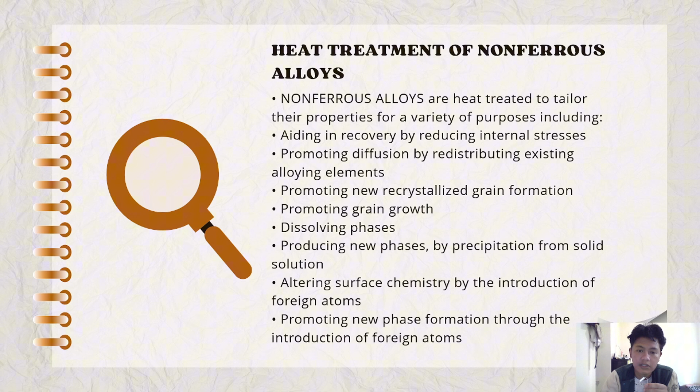Recovery and recrystallization annealing. Annealing is primarily a function of two main variables in non-ferrous alloys: the temperature to which the material is heated and the hold time at temperature. For steel alloys, the rate at which the alloy is cooled back down from the soak temperature is a critically important factor during the annealing cycle, and the cooling rate may also be an important factor for specific non-ferrous alloys.

When annealing is performed for short periods of time or at low temperature, the hardness of a cold worked alloy remains relatively constant. This initial stage is referred to as recovery annealing.

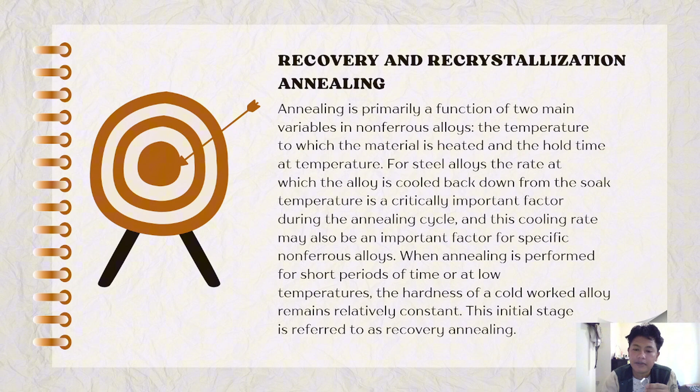Cobalt alloys. These are the characteristics of cobalt alloys, such as strength and hardness. Cobalt alloys, such as Stellite and cobalt-chromium-molybdenum, are known for their exceptional strength, hardness, and wear resistance, making them ideal for applications that require high performance and long-lasting components. The high temperature stability. These alloys maintain their mechanical properties even at elevated temperatures, allowing them to be used in high heat environments such as cutting tools, aerospace components, and medical implants.

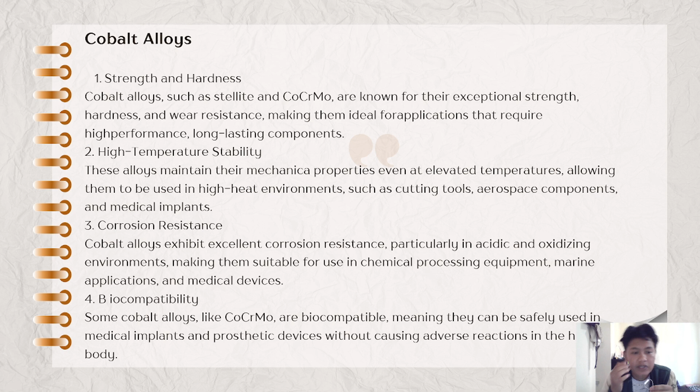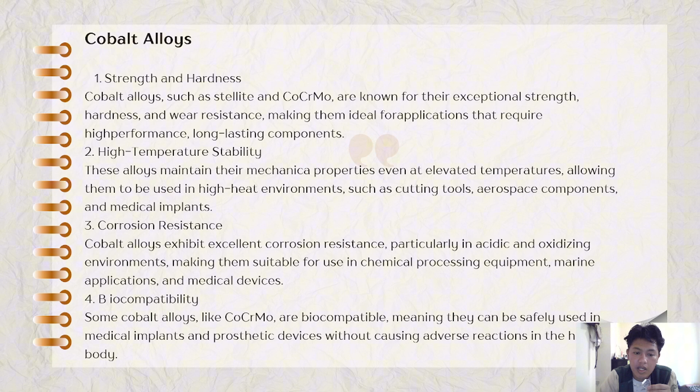3 is corrosion resistance. Cobalt alloys exhibit excellent corrosion resistance, particularly in acidic and oxidizing environments, making them suitable for use in chemical processing equipment, marine applications, and medical devices. 4 is biocompatibility. Some cobalt alloys, like CoCrMo, are biocompatible, meaning they can be safely used in medical implants and prosthetic devices without causing adverse reactions in the human body.

Next is copper alloys. So this is the example of copper alloys. Brass, an alloy of copper and zinc, is known for its excellent corrosion resistance, machinability, and decorative appearance, making it a popular choice for hardware, plumbing, and architectural applications. Bronze, an alloy of copper and tin, is prized for its high strength, hardness, and resistance to wear and corrosion. It is commonly used in statues, medals, bells, and other artistic and historical objects.

3 is copper-nickel alloys. Copper-nickel alloys exhibit excellent resistance to seawater corrosion, making them ideal for marine applications like ship hulls, propellers, and heat exchangers. Next is beryllium copper. Beryllium copper, an alloy of copper and beryllium, is known for its high strength, hardness, and electrical conductivity. It is commonly used in springs, connectors, and other high-performance applications.

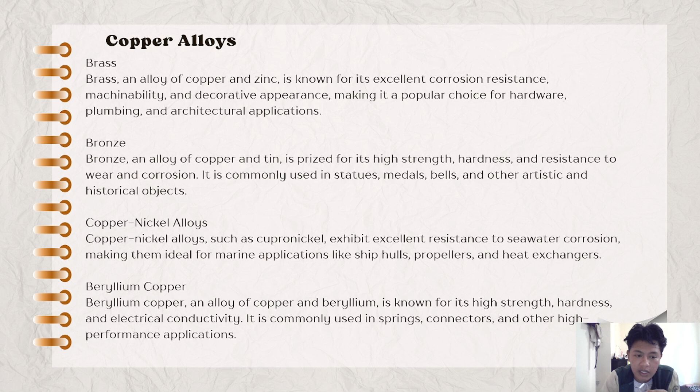This is now the topic about magnesium alloys. So these are the characteristics of magnesium alloys, such as lightweight, corrosion resistance, castability, and damping capacity. Lightweight: magnesium alloys are among the lightest structural metals, with a density about one-third that of steel or aluminum. This makes them ideal for applications where weight savings are critical, such as in the automotive and aerospace industries.

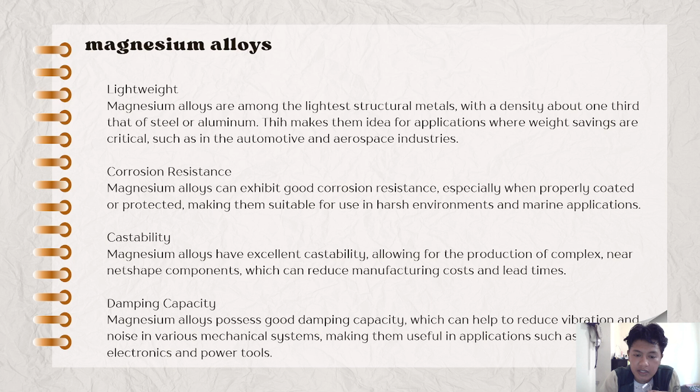2. Corrosion resistance. Magnesium alloys can exhibit good corrosion resistance, especially when properly coated or protected, making them suitable for use in harsh environments and marine applications. 3. Castability. Magnesium alloys have excellent castability, allowing for the production of complex, near-net shape components, which can reduce manufacturing costs and lead times. 4. Damping capacity. Magnesium alloys possess good damping capacity, which can help to reduce vibration and noise in various mechanical systems, making them useful in applications such as consumer electronics and power tools.

Nickel alloys. Nickel is an austenite former and no allotropic phase transformation occurs in nickel or the high nickel family of alloys. The alloys are austenitic from the melting temperature down to absolute zero. Nickel has a natural tendency to combine with sulfur and/or oxygen. It is found in nature as nickel sulfide and nickel oxide ores.

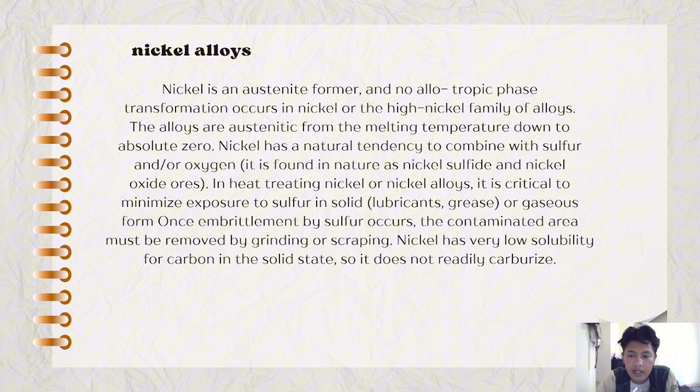In heat treating nickel or nickel alloys, it is critical to minimize exposure to sulfur in solids, like lubricants and grease, or gases. Once embrittlement by sulfur occurs, the contaminated area must be removed by grinding or scraping. Nickel has very low solubility for carbon in the solid state, so it doesn't readily carburize.

Titanium alloys. The response of titanium and titanium alloys to heat treatment depends on the composition of the metal and the effect of alloying elements on the phase transformation of titanium. Like iron, titanium is an allotropic element. Titanium has an HCP crystal structure, or hexagonal crystal, called alpha phase at temperatures below 885 degrees Celsius.

When the temperature of pure titanium reaches that temperature, called the beta transus temperature of titanium, the crystal structure changes to a BCC structure, or body centered cubic. The high temperature BCC structure of titanium is referred to as the beta phase, which persists at temperatures up to the melting point.

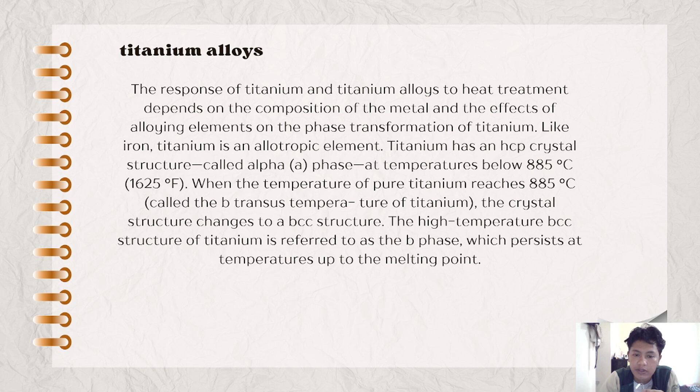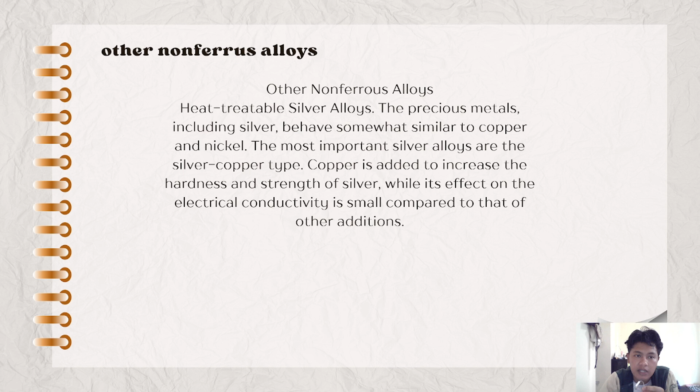Next, the last is other nonferrous alloys. The precious metals, including silver, behave somewhat similar to copper and nickel. The most important silver alloys are the silver-copper type. Copper is added to increase the hardness and strength of silver, while its effect on the electrical conductivity is small compared to that of other additions. Okay, that's the last topic about nonferrous alloys.